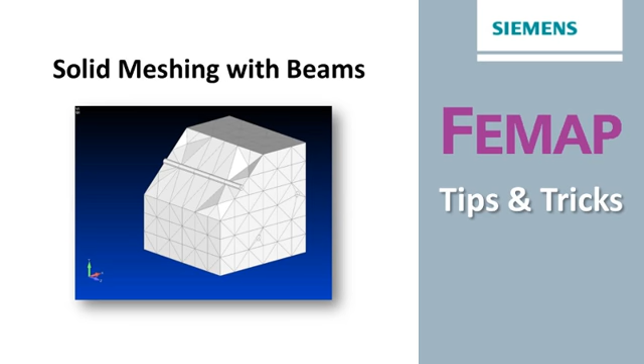Structures like reinforced concrete, where steel rebar is encased in solid concrete, can be represented by 1D rod or beam elements for the rebar inside solid 3D TET elements for the concrete. When setting up such a model, you have to take care to ensure that the mesh is contiguous and that the 1D elements connect with the 3D elements correctly. Let's take a look at how you can set this up in Femap.

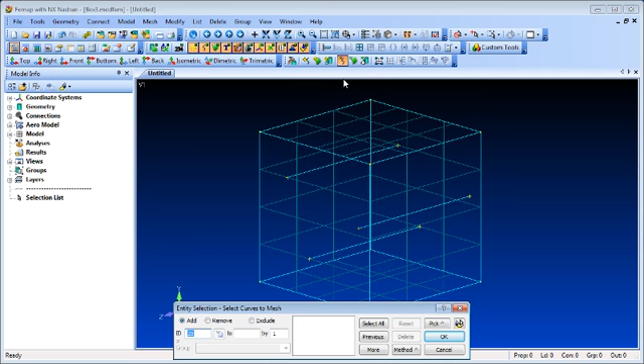In this simple demo model, we have a solid block for the concrete that contains 3 internal curves that will represent the rebar. First, we need to create mesh points on the surfaces where the internal curves connect to ensure that the surface mesh will create nodes at the internal curve positions. Then we can mesh the internal curves to create rod elements in this case, as they will adequately represent the tension compression properties of the rebar.

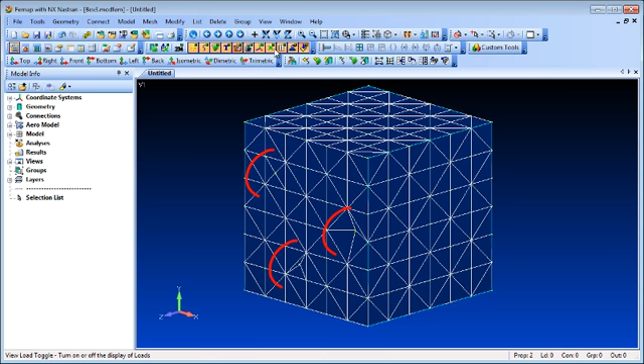The next step is to mesh the bounding surfaces, and we can do that by selecting the Solid Mesh command, electing to surface mesh only. Selecting a hidden line view at this point will show that the meshing points have been picked up correctly. Now, with the curves and surfaces meshed in separate commands, there will be coincident nodes at the mesh points that will have to be removed.

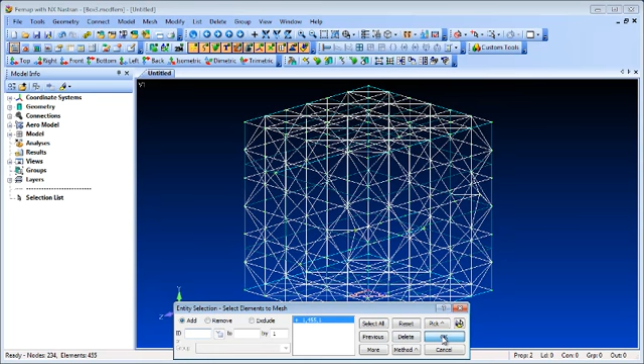Now we can create the solid internal mesh using the Solids from Elements command, which will create a contiguous mesh correctly connecting the rod elements to the solid TET elements. Verifying the interior of a solid visually can be challenging, but in Femap we can use the grouping function to create a subset of the model that can be blanked off. In this case, we'll put the corner elements of the block into a group, such that when they're blanked off, one of the interior lines of rod elements will be revealed.

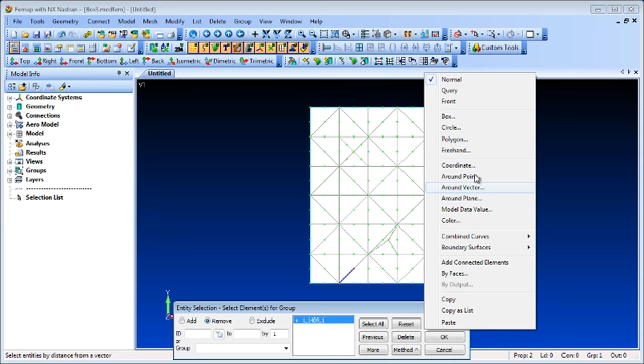And so you can see that a contiguous mesh has been created, correctly linking the internal rod elements with the solid TET elements inside the structure.